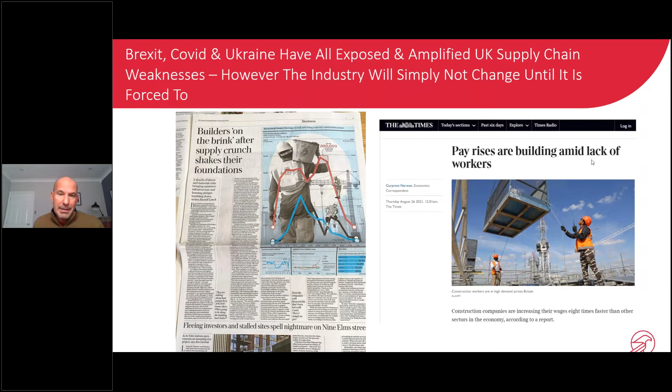So with all the things I've outlined, whether it's Brexit, whether it's the pandemic, whether it's the war in Ukraine, all of these things have really served to amplify issues that I would suggest are not new. They're all things that we already knew in terms of lack of resiliency in our industry. We've had huge issues with inflation, driven by erratic supply chains and resource scarcity. We have big issues with labour inflation driven by lack of resources, and I'll come back to that in a second. All of this is not new. All we've had is an amplification, if you like, of those issues that have been in existence for a long time. Next slide, please.

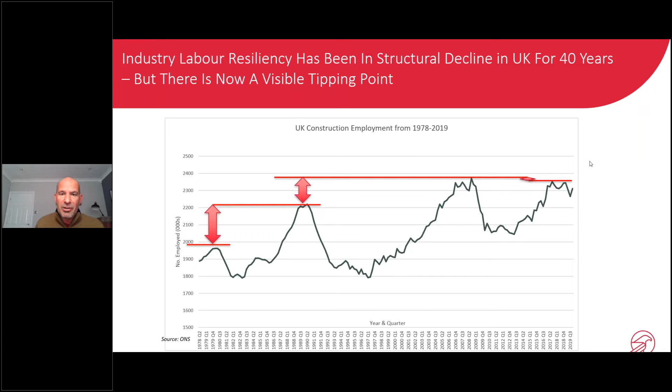It actually reduced, it peaked out at less than the previous peak employment position. Now, that might not mean much to many people, but for me, it's really, really telling that what I've been unable to do in the last economic cycle is reinflate our workforce to a level it was before, or indeed beat it, which is what we've done in every other economic cycle, as a function, if nothing else, of population growth. So the actual total number of employed people in the industry is usually tracked to population growth, which has grown significantly in the last 10 to 15 years, and we haven't seen that. We're now seeing real growing pains every time we look to grow our industry and our output. We have issues, and you can see it here.

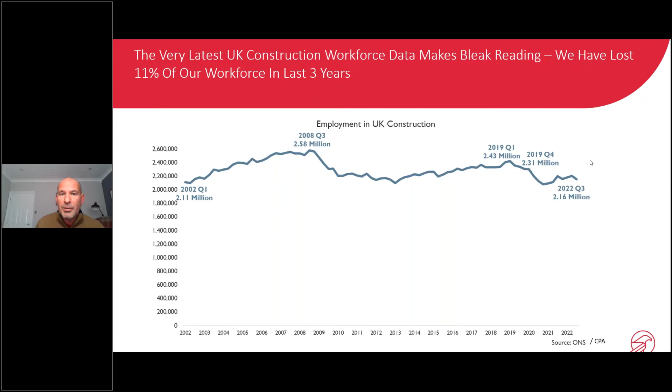This is an amplification of that last bit of that graph. So looking back, from the peak just before the global financial crisis at 2.58 million employed in 2008, pre-COVID that hit 2.43. As of the last month or two, we're now down to 2.16 million people. So that should be a real wake-up call. We've lost 16% of our workforce in the last 15 to 16 years. And that's at a time when the UK's population has grown by the order of 5 million people. So as a resource base, we have less people that is required to do more in terms of building homes, schools, hospitals, all the other infrastructure we need.

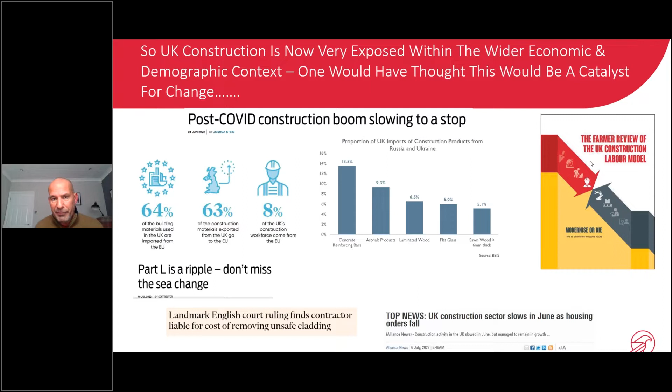COVID was an interesting period of transition in some respects for the industry, because what happened during 2020 and 21, particularly in 2020 when we first had the onset of the pandemic, is that the industry came to a grinding halt for a short period of time. Then it got going again in socially distanced conditions, and all of the anecdotal evidence I've heard talking to senior representatives of contractors is that individual team site productivity actually went up during COVID.

It's undoubtedly linked to the fact that social distancing drove more structure and order to how production was being planned on building sites. So the fact that you had less labour, but it was more organised, spread out more, with less risk of damaging each other's work or trades falling all over each other, actually led to a net productivity uplift at a team level, albeit in many instances total output reduced because there was less labour.

What's happened since, unfortunately, and this hasn't been borne out in official statistics, but I'm hearing it anecdotally, is that we've had a big fall away in productivity since the pandemic ended, in the last 10 months or so. I'm hearing that productivity on construction sites, and even in professional services, is down. And that does not bode well against the backdrop of all of the issues around labour supply that I just outlined.

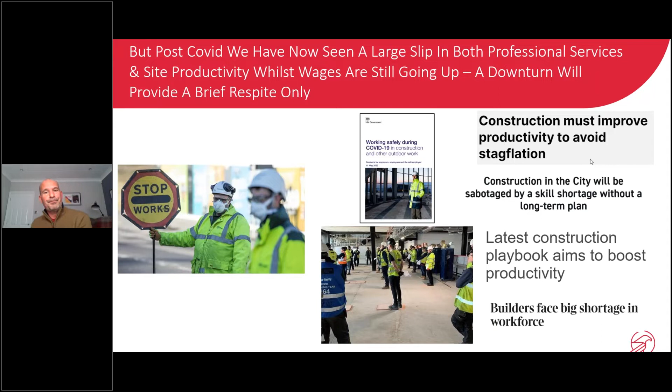I think one of the key issues to think about here, particularly if we're going into a new economic cycle, is that we have a public sector ability to fund the industry and ensure that the construction industry has stimulus for growth in an economic downturn, which is under pressure.

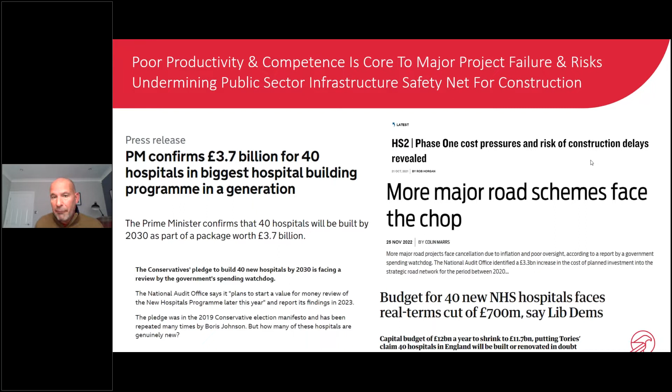The ability for the government, with everything that's gone on over the last year or two, bailing out from the energy crisis, the pandemic, means there is no big pot of money that's going to fund a massive infrastructure program. There's already commitments made to infrastructure, but as these headlines suggest, a lot of that's already under pressure in terms of affordability. So some of this is down to productivity and competence and lack of ability to deliver predictable results, actually having an impact on the government's confidence to use the construction industry as well.

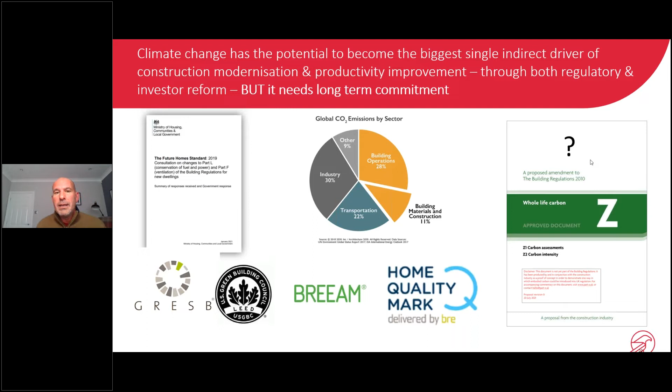It needs the government to be very clear on how it's going to define net zero and how it drives that into the built environment through regulation, and how investors are going to drive it through ESG patterns of funding as well. That's a really important element of change that I think hasn't really started to come to the fore yet, but it will over the next 5 to 10 years.

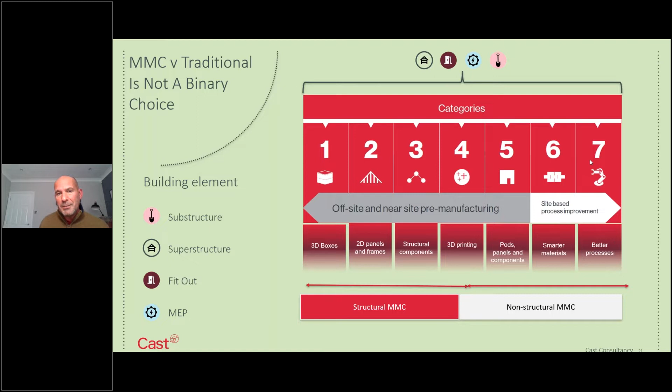It's all about proportions. This is not whether a job is an MMC job, because actually I would say 60 to 70% of all construction in this country has some form of MMC being used in it. So when you hear statistics saying there's only about 10% of jobs with MMC in it, they're all wrong - I can assure you that, because they're not measuring the right thing. We should be measuring the proportions of what is being built in this country in terms of labour, plant, material, process, supervision, temporary works. That's the only way we measure progress holistically, because there's all different types of MMC being deployed already.

At a macro level, this is what it boils down to. It's actually trying to adjust an equation, which at the moment is 60% process-orientated for most home building construction, and rebalance resources. That requires less labour on site, less process on site, and going from 40% of pre-manufactured value - which is the material inanimate content - moving that to 55%.

So moving that dial is the objective here. That's the policy objective of government. That has to be the objective of industry, to enable us to do more with less human capital, because for the reasons I've already set out, we have less and less human resources to be able to achieve the same level of output.

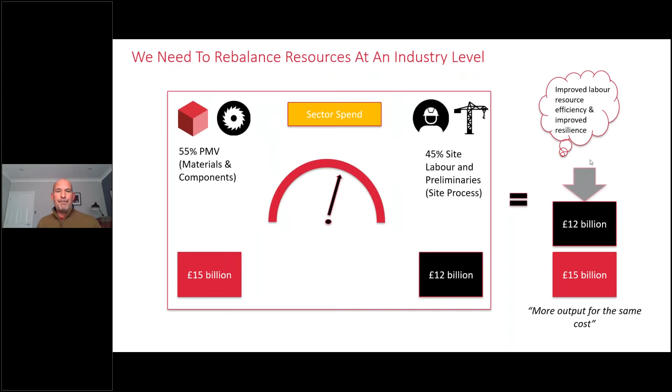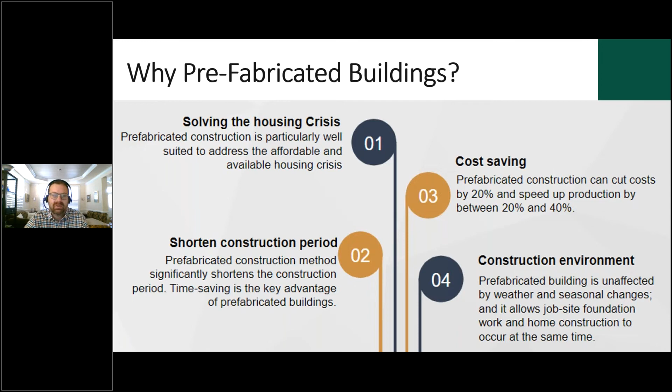I think the other piece is really recognizing where site-built construction may be specifically localized. There are huge opportunities in the offsite construction space for expansion globally, and more and more finished products moving through the supply chain.

So just a little bit of background on ISO. ISO is really a consortium or a gathering of national standard bodies from around the world. So BSI, for instance, in the UK, develops standards within the context of the UK, and then there are 166 other national bodies that come together to really identify where are there opportunities for collaboration, how can we share best practices, those sorts of things. ISO has about 25,000 standards that they develop through 809 technical committees.

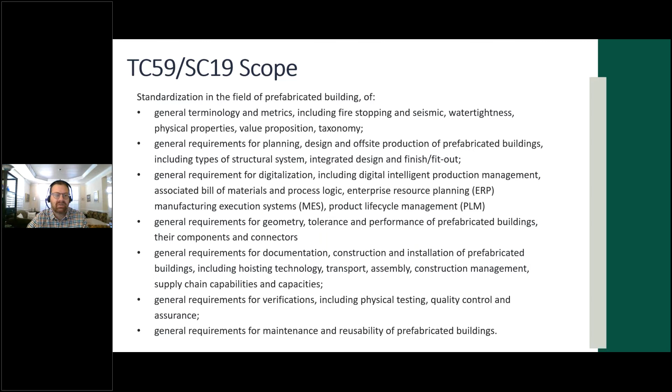Because of the broad scope of activities that ISO covers, there are elements that are covered within different technical committees or subcommittees. So there's always a list of exclusions of what the subcommittee is not going to cover, and navigating those boundaries is important. So they document these exclusions for that benefit.

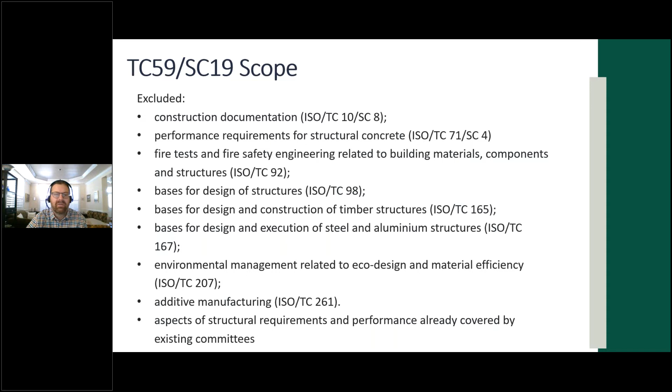One of the first steps that the committee takes, even in the formation of the subcommittee process, is reviewing what existing standards are out there—naturally looking at existing ISO standards that help support offsite construction, looking at CEN standards, and then looking at national standards that have been developed.

Already we've compiled the list of relevant standards from Germany, France, Japan, China, and the US. There are also Canadian standards, and I know Standards Australia is doing work in this space. So really being able to see how we can harmonize, and where we can harmonize, to really help drive progress.

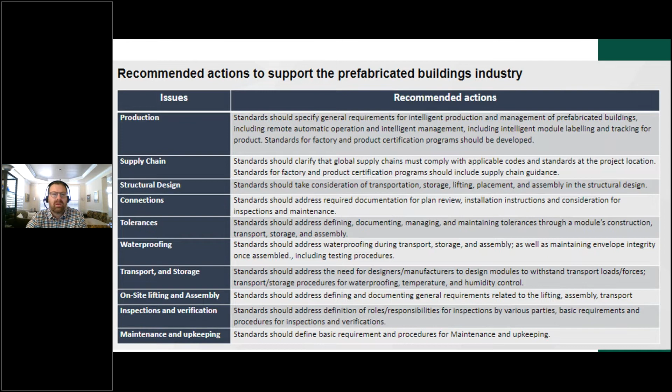So here is sort of the timeline of activities, really towards developing a comprehensive work program, identifying standard needs, standard activities. We're just at the very early stages of this process, really setting up a working group to look at terminology, which should set the basis for many of the other standards activities that flow from there. Moving from the terminology, we'll look at the specific standards needs, and then work through that process.

As Matthew mentioned, certainly having the important participation from key countries and standards developers that are working in this space is really important to assure both our domestic needs are addressed, and that the standards that are developed in this space recognize existing standards and how things work best together. I think the one thing to note about the ISO process, it is very deliberative. So I think we'll see things come out in fits and starts. I expect our next meeting will be in 2023 at some point.

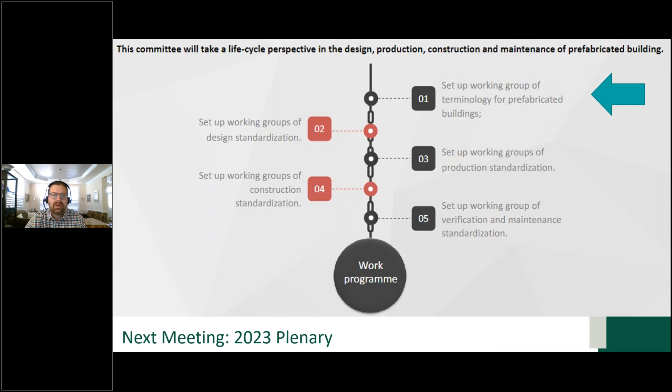So with that, hopefully that provides a quick snapshot of some of the international perspectives and international activities in this space, and certainly look forward to answering any questions folks may have.

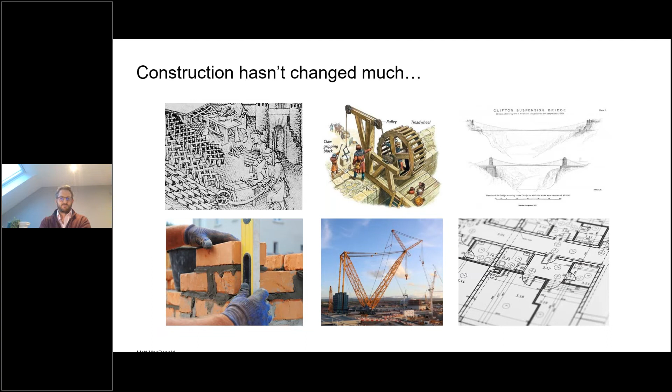If we set that, as we've heard from Mark, against some of the huge pressures we're facing, starting with demand, this certainly isn't going away. We've got both bigger population and more urban populations, and greater demands for quality of life. So there's an increased demand for building and infrastructure, both in the UK and globally. In fact, this is roughly equivalent to all of the built environment in Australia and New Zealand every year for the next 3 decades. So if we set that against the increasing shortfall in resources, both the labour resources we've heard about, as well as financial and environmental, then we do need to find a slightly different paradigm, a different way to balance everything.

I don't want to beat up the construction industry all the time, because we do deliver some of the most impressive feats of human endeavour, enabling safe generation and transmission of electricity, for example, spanning obstacles, man-made and natural, to allow transport systems to work, building huge one-off towers in incredibly constrained sites, massively complicated assets such as hospitals that effectively outsource functions of people's bodies. But set against this backdrop of demand and supply, our current levels of digitization, productivity, and effective use of money and resources don't really seem to cut the mustard.

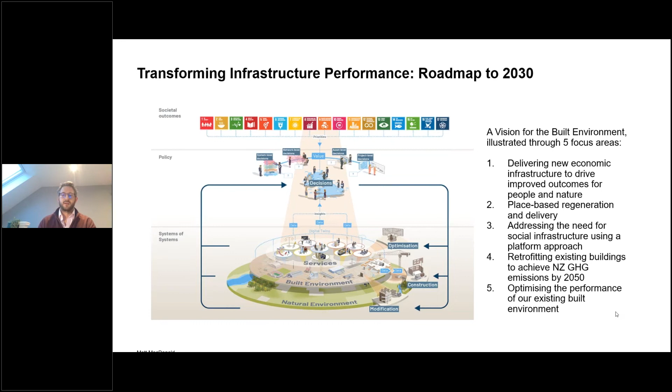It's then reinforced by the Construction Playbook, which is hopefully familiar—a comply-or-explain approach for public sector procured projects, representing a collaboration between government and industry. Within that is a clear intent that we'll look to procure construction projects based on product platforms.

These platforms provide a stable core configured and combined with complementary components via defined interfaces to suit a particular project. All fancy words, but what does it mean in practice?

Kitchens are a pretty good example of how this works—how we get this balance between repetition and variability. We have carcasses, feet, hinges, dimensions, production methods, installation methods, all pretty much the same everywhere regardless of the system you buy and where you buy it, unless it's completely bespoke.

But they have to respond to a huge amount of variability. The doors can change—you can choose different styles, different colors. You can change your work surface, the finishes, the lighting. You have to tie in with existing plumbing, the shape of the room, windows, and so on. It finds a way to achieve this balance cost effectively and at scale.

If we zoom into the kitchen, we can even start considering a sandwich as a form of platform—where we've got common, repeatable things, and some defined interfaces that can be combined in huge numbers of ways to tailor to individual tastes.

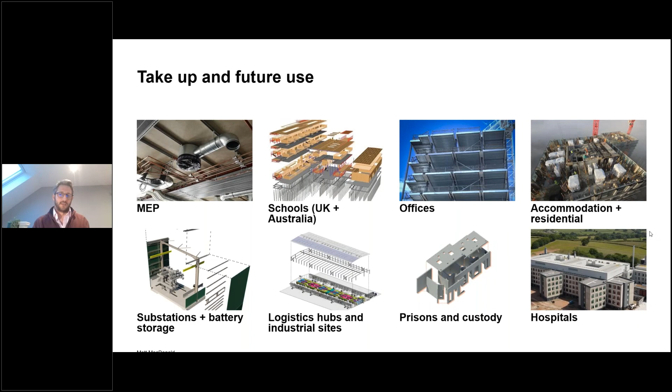That's not to say nothing is happening. We're seeing the use of platform approaches across a pretty wide array of asset types, from MEP through to schools—which is Gen Zero from the Department for Education—into offices, accommodation and resi, and then into less social infrastructure things, such as substations and logistics hubs, as well as justice and healthcare facilities.

So what might a project look like in this new approach? Picking up on Matt's comment earlier about the Value Toolkit, I think in an end state, or future state of this, we see an ability to set and weight outcomes for a given project or need, which ends up being more outcome focused.

That allows the creation of, in this healthcare case, a harmonized schedule of areas, so we know what the individual building blocks are for the facility, configured according to adjacencies and clusters of spaces. That allows a range of platform systems to be rapidly configured digitally against those requirements and assess assurance much more quickly than currently happens.

There can then be a stage where that configuration is tailored, if required, based on the value set across multiple dimensions. Orders can be placed based on proven compliance of each system, because we've got defined, known and documented quality standards, and then we're able to deliver using more known, predictable, certain approaches, because they've been pre-engineered and systemized, taking a lot of the risk and chance of error out of the delivery process.

Benefits for clients, it's quite a lot in here, but I think depending on the method adopted, we definitely see things like speed and reliability, and similarly certainty and predictability going up using this approach.